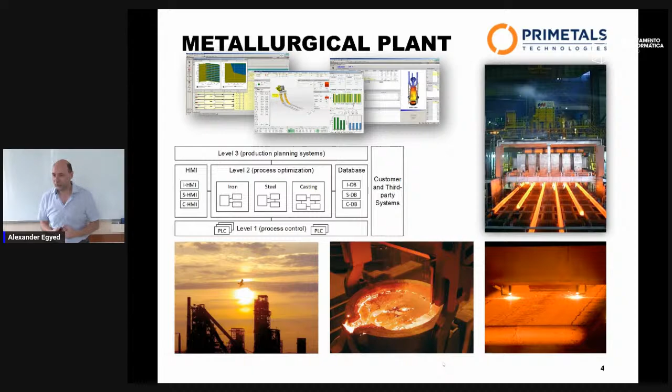There's a company close by that builds steel plants. That's not just some code that runs on a computer and that's what the steel plant is. These are distributed systems, so-called cyber physical systems. There's hardware, and there's software.

And you can go beyond. We're working with a company that builds assembly lines for manufacturing machines. We're working with another company that builds machinery for factories. Actually, this is very much a trademark of the region of Upper Austria that we are part of.

We are not so much a manufacturing hub for producing end-user goods. So if you're asking me what you can buy that's been produced in Upper Austria, you probably wouldn't find much. Haribo sweets, maybe, the little gold bears. But there's little being made that you would actually buy.

But a lot of the machinery that factories around the world want to buy to build their factories are actually coming out of that region. Whether it's bending machines or plastic injection machines. I mean, all of you played Lego, right? Not a single Lego block comes from Upper Austria, but some of the main machines used to extrude the plastics that Lego uses are coming from Upper Austria.

And these companies are our industrial partners. This brings us to a very unique position. So it's not that we're trying to help Lego build nicer Lego blocks. But we're trying to help a manufacturer of machinery, which is a complex system, build that complex system, which will eventually end up in an even more complex system, like a factory.

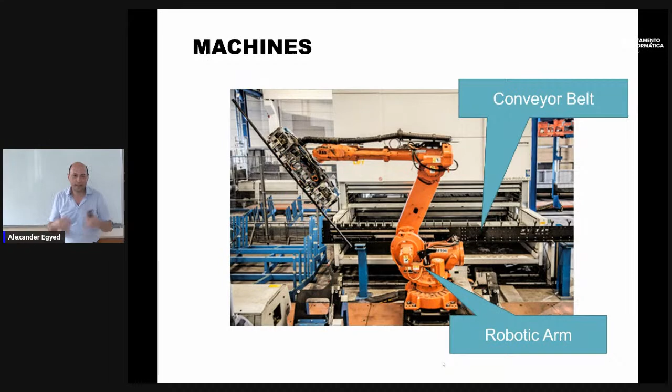That is somehow a network of possibly multiple factories. I mean, hardly a factory works in isolation these days. And that creates this whole idea of cyber physical systems and what to do with that.

So when I went to Linz, I went mostly with my software engineering perspective. But when I arrived in Linz, a bunch of people kept knocking on my door who were not software engineers. Mechatronics departments, very popular. And electrical engineering, mechanical engineering, hydraulics, aerodynamics - all these kinds of beautiful things that we have no idea about. I don't have an idea about. Maybe that's different for you guys.

And these guys kind of knocked on my door and said, we're building these wonderful systems, bridges and skyscrapers and steel plants, but we don't know what to do with software.

At the same time, it's almost arrogant from us software engineers to say, if you want to understand my software, here's my Java code, just read my code. That's not software. Sure, that's what the computer interprets at the end of the day, but that is not what a human should be consuming.

Even though we'd like to think that all software engineering is looking at someone else's code, and if it's nice and documented with beautiful names, method names and variable names, we feel like that's already accomplished a lot.

In reality, there are a lot of people who could not possibly read your code - not because they're lazy, not because the code is too complicated, but because they've never studied computer science. Yet they are working on systems where computer science plays a very integral part.

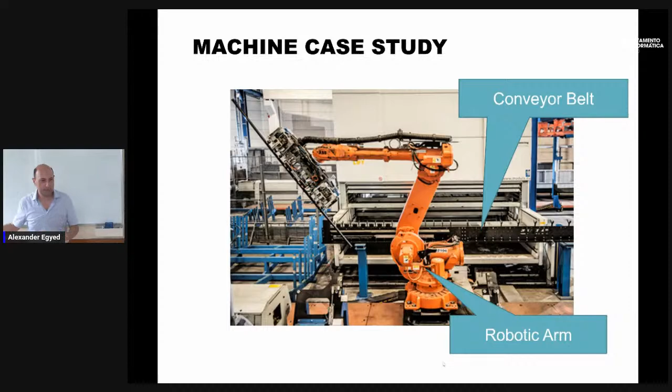So we had our engineers sit down, they built the system, it's working wonderfully, and then something changes and everything breaks. This is the recurring theme that happens. So how does engineering work? I'm simplifying it, of course, you guys know that here. But there are people involved, not necessarily computer science people. There's this person doing some use case description, if they happen to be using UML, whatever they might be using. There are other people who might use design languages, for example, again UML.

But in our domain, there are other tools being used. Microsoft Excel is a very commonly used engineering tool, as much as we don't like to think of it that way, but it's being used for lots of calculations. In this case, we're building a robotic arm, in case you're wondering. And here is a little Excel sheet that computes how long the arm has to be for me to reach, for example, this cup.

And the arm may not be able to stretch completely, it may have to be bent, so there are angles involved. And based on the distance of the cup and based on the angles that are possible, I have to design the arms in a certain way. This is trivial, this is high school math. I think all of you can understand this if I explain it to you. It can get more complicated than that, of course, but that's not important for my talk.

The important thing is this information moves around. It's not that this person keeps it a secret what the length of the arm is. This is, of course, information needed by other people. For example, this lady doing the CAD drawing needs to use the information that was given here, right? And once you understand what the arm length is, maybe there are different designs, different lengths that you can purchase. Maybe you don't get a 17.7 millimeter arm, maybe you have to get the next bigger one, round it up to the next 50 or something like that, and that's okay. Then this is what this lady will decide, she will design this thing. And of course, that information is then also further propagated to other people, at some point, even to software engineers. Because how can we possibly write software that controls a robotic arm if we have no idea what the dimensions or the angles are that we can use or exploit?

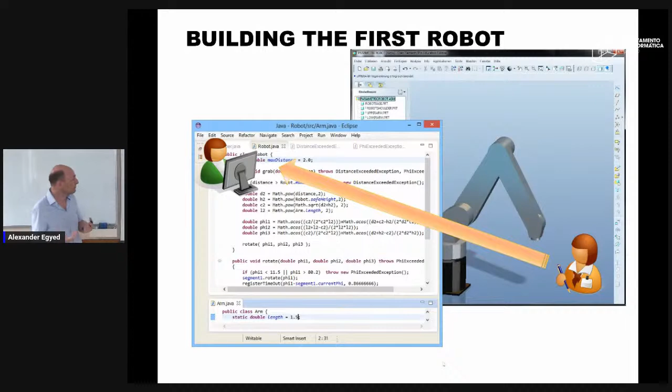Maybe it is, because at the end of the day, it's not one person, two persons, 3 or 4, but hundreds, can be thousands of people. And what these lines are supposed to indicate are lines of communication that we talk to one another in some ways. And this is the knowledge, the combined knowledge of a complex cyber-physical system. All the things that the individual people are doing, but also all the things they communicate to one another as part of the engineering process.

So, obviously we have mechanics, computation, electrical, requirements, design, simulation, planning, programming, whatever it is. And now you can also tell why I really like to work with the mechatronics department. This is a little side note. Whenever I work with just computer scientists, when I start about UML, they're like, no, please stop, we're real software engineers, don't bother us with UML. If you work with a mechatronics engineer, you never have to argue why you need models.

They live models, they work models. They literally build and design models all day long. They use them as an analysis platform, for simulation, for synthesis, for generation. This is actually very beautiful because a lot of the things we like to do as part of our work motivates what they actually live. And at some point, even software engineering has to find its way of interacting with that world. This is what I'm trying to facilitate.

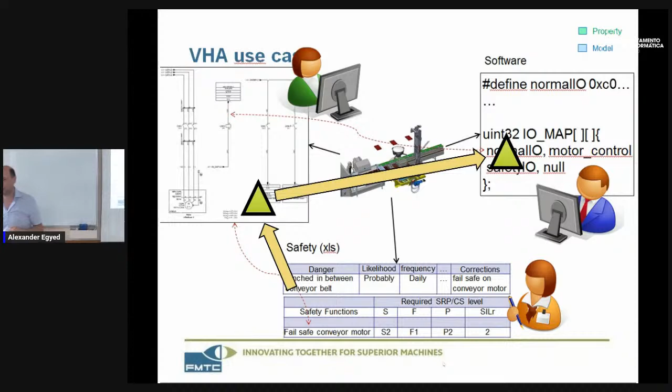This is the notion of change and how it propagates. And the problem that all of you are surely aware of is these changes are not exceptions, but the norm. They happen all the time. This is exactly where engineering has so many points of failure, mostly starting with changes that people are not fully understanding. In most cases, that's what it is.

All right, let's fast forward here a bit. This is a fairly huge area. We can talk for days about this and all the problems, and I don't have the solution for you right now. But we're working on something called the design space, where we're trying to support an engineering team.

And you might ask yourself, well, this must be grandiose. Of course, it has been a large project. There have been dozens of people involved over the last 5-6 years to build what I'm going to show you the next half an hour or so.

But the thing really is, the principles of the design space are very trivial, because the only way we can ever provide meaningful traceability—like connecting all these islands, consistency, change propagation, error checking, whatever it may be—is if engineering knowledge comes together. It would never work if each tool is separate, obviously. So the design space is simply a platform for representing engineering knowledge.

You can put anything in a design space. Think of it as a cloud, a place where you can dump your data. But this is the funny thing about clouds. People think clouds are wonderful because you can dump all your data there. But the thing is, what happens to this engineering data if you dump it in the cloud? It is still islands of knowledge, just sitting in a different place. So that doesn't do anything.

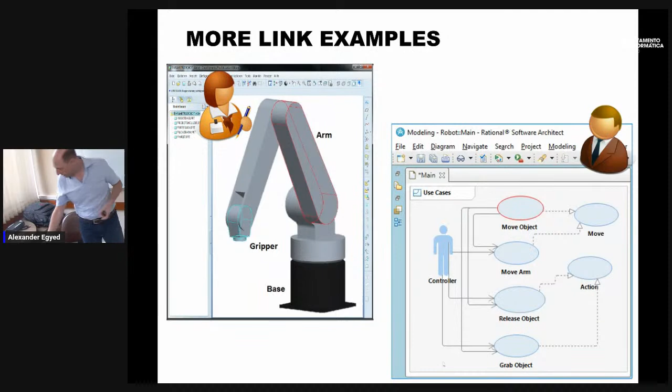Let me give you a little example, and I have some short movies - this is still about 25 minutes. Okay, good. For example, you want to connect knowledge here. For example, you want to take this one tool where you have these use cases and you want to connect it with that tool that has this robotic arm.

These robotic tools, by the way, are pretty smart. It's not that they have notions of lines and geometry only, but they usually also have notions of components and parts, so you can actually identify parts as a whole. But let's say you want to make sure that for every part there is a use case. Why would you want a piece of hardware in your system if you don't have a use case for using that part? In this case, trivial. But remember, steel plant, not that trivial, right?

So this connection, how do you build this connection? This is a UML modeling tool - I don't know, Papyrus, Paradigm, whatever you want to use for UML modeling. This is, I think, PTC Creo, something, CAD modeling. They don't know each other. They're engineers, maybe met at a conference, but they're not really talking to one another. There is no import-export mechanism between these two worlds. It's basically, there's nothing there.

So what could we do? I mean, what could we do? There's this whole software engineering community that writes papers about traceability and how to do automations. This is traceability. So how do we do the most basic thing, meaning adding a trace, a link between one tool and another one? And the answer is you can't.

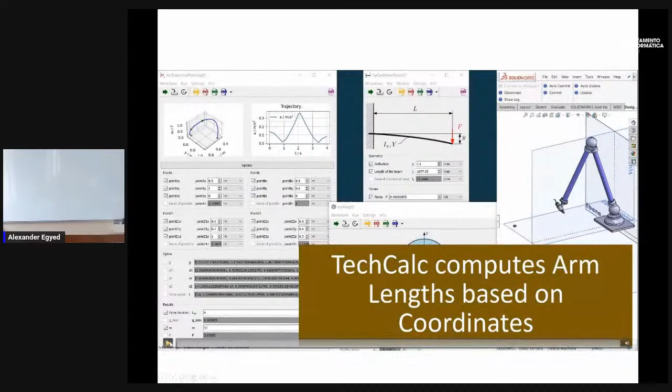I can show you that maybe in the next example, run that. Still have a few minutes.

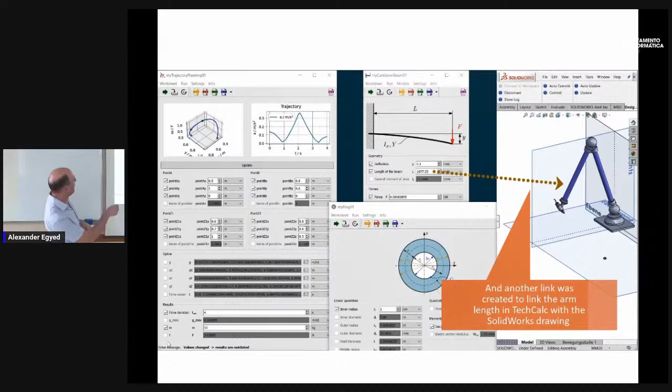On the right-hand side, you see a different tool called SolidWorks, commonly used. I don't know whether anyone knows SolidWorks. On the left-hand side, you see, let me pause this, sorry, it's going too quick.

On the left-hand side, you see a tool you've probably never seen before. This is called TechCalc. It's built in Linz by a competence center called the Linz Center for Mechatronics. It's actually a pretty cool tool if you're a mechatronics person.

Basically, what they do is try to solve simple to complicated mathematical equations, but so that you can choose from what dimension you want to calculate. The easy way of explaining it: all of you probably calculated circles in school. You have a radius of a circle, and based on that, you can tell the area of the circle. But you can also do it the other way around. You can say, what if I have the area of a circle? It can compute what the radius is.

So that's exactly what this tool is doing. It understands all these equations, but it doesn't care from which direction you want to compute. You give it all the values you want, and it will try to compute all the other values it can possibly derive from it. You don't need to understand any more than this. You can imagine why engineers would love this.

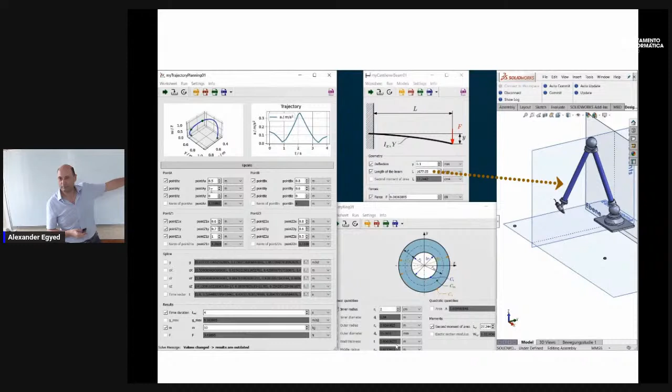Okay, what does that have to do with this? Very easy. This is my robotic system, and this is my modeling of the robotic system, and it's doing things like bending. When you have a robot and you put weight on it, it will bend a bit down, the metal will bend. And that is being calculated. Don't ask me how, I'm not that good, right?

And these here, I think, are the movement calculations. Like when you grab an object and move it around, this object makes a certain movement in space. This is supposed to be this way. So you can see this is a bit more complicated than what other ones do.

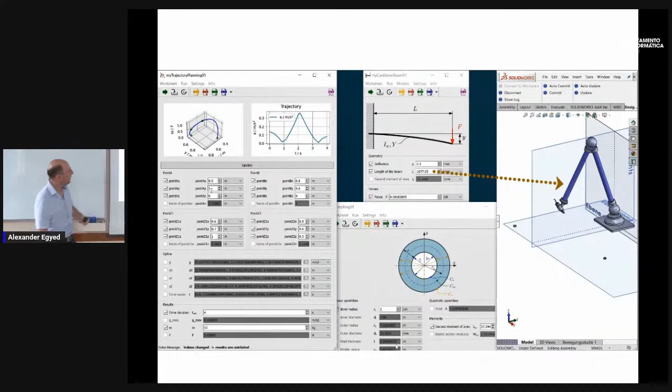We don't care about any of this complication, but what we care about is how they affect one another. For example, somewhere along the line, you specify where the locations are of the object you care to pick up. Based on this, a certain distance is calculated between me and the object that needs to be picked up. And somewhere it specifies the material of the robotic arm being used and how much it bends, and don't ask me what. And somewhere at the end, it will compute the length of the beam necessary to achieve this.

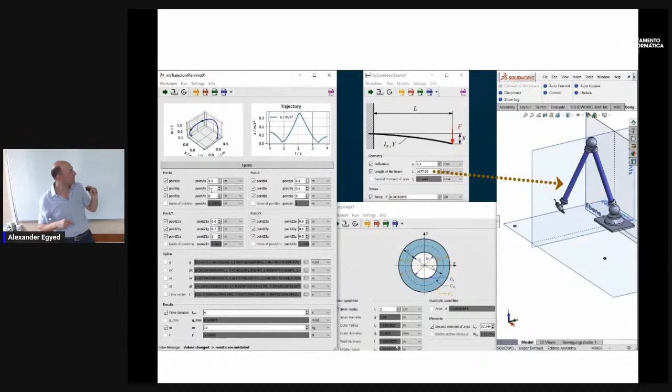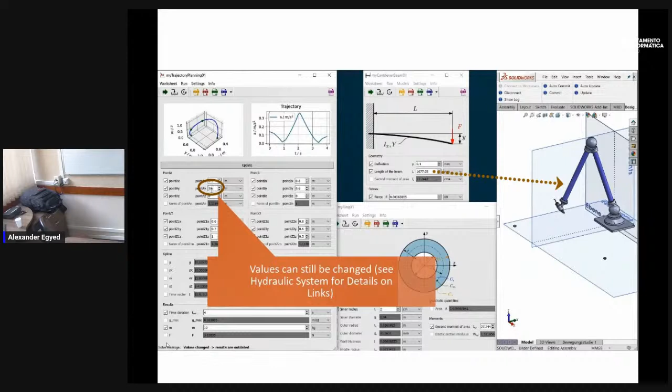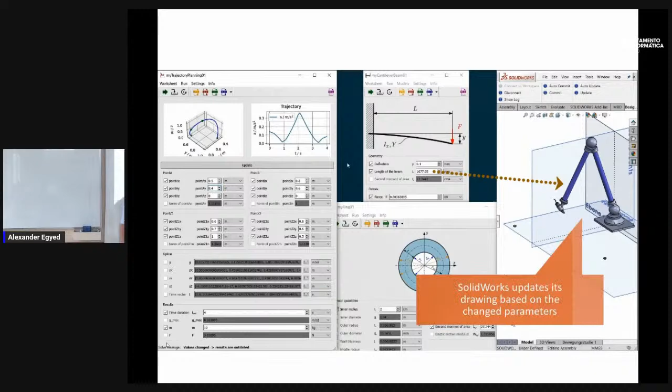So it considers now the same arm length calculation we showed before with Excel, but a little bit more technical. So if I now change the location here on the left, nothing should happen on the right, because they are separate tools. But of course, we build a tool that influences one another, so we can actually link this in the design space. So if you start modifying one tool, it will automatically start updating the other tool. So the SolidWorks just redrew itself because the arm length changed, because it was changed in another tool.

In this demo, I don't want to show you the whole version. We even started from the requirements. In the requirement, it specified, I think, the distance. It will then translate it over to TechCalc, which is then translated over to SolidWorks. So now you have multiple-hop change propagation of a very trivial kind, simply replication of values.

And we weren't even quite sure how the community would react to that, because this is so trivial. This is not scientific - copying values from one place to another, what's a scientific contribution? There is none. But the fact that you can use a mechanism like the design space to so simply implement this is the contribution. And we were actually quite thrilled - at MODELS, a couple of weeks ago, we got the best paper award, for example.

This is one of the many applications we are doing with industry. And you can tell from my examples that the way we work is very interactive, in one sense that we do things on our own, but we also like to work with industry and really see how what we're doing affects them in some ways.

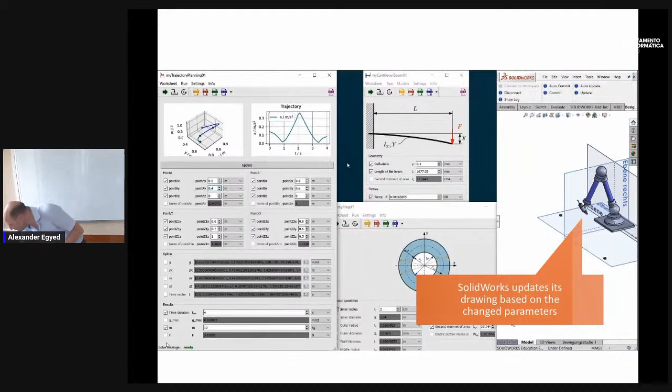All right, fast forward. Almost no time anymore. You might like this one here. This is kind of cute.

Imagine you're using Visio, a drawing tool. In Visio, you can draw shapes, and you can draw a state chart diagram in Visio. And Visio doesn't care what this thing is. You can connect a final state and make an arrow to a starting state, which makes no sense whatsoever. But Visio is very happy to do this for you.

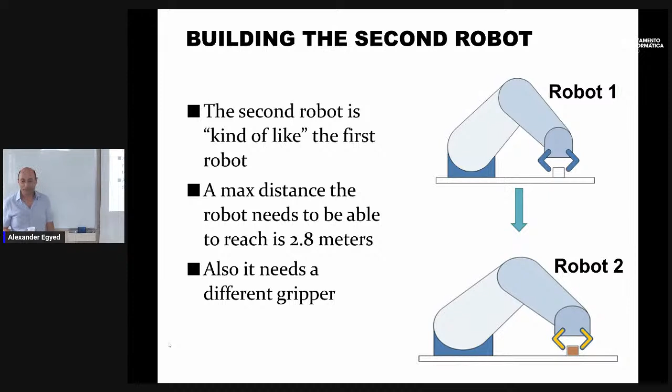And now I'm really stopping. So we have a few minutes for questions if you'd like to ask. Questions?

I have a question, actually two questions. First, I understand you are handling a very relevant topic, which is the communication within multidisciplinary engineering teams, for instance mechanical, electrical, and software engineers working together. I see that design space represents a solution option for communicating changes between these. We did a project once focusing on causal analysis within this specific context of multidisciplinary engineering teams, done with Stefan also and the Christian Doppler lab. The main issue we identified with the causal analysis was exactly the communication between the different disciplines. One of the recommendations for solution options to handle this problem was identifying the common concepts and linking them semantically, so that we could propagate the changes and communicate between the different parts. So as I see it, design space represents a solution option for this, it could have been used in this context to implement this identified solution proposal. Or did I get it wrong?

The design space is kind of like a hammer in this regard, and you have choices how you could deal with this problem. Stefan Biffl kind of likes to think of transformation.